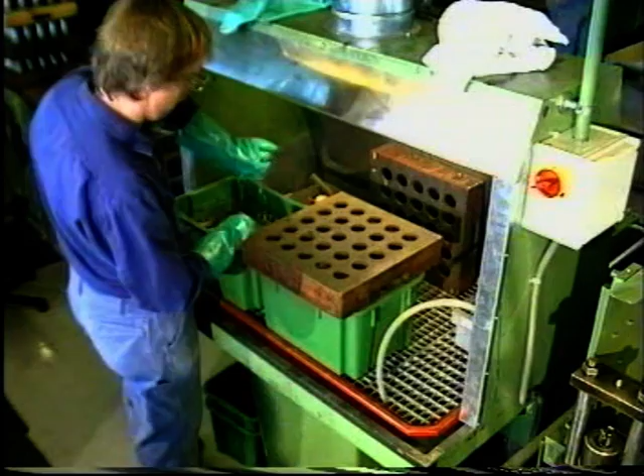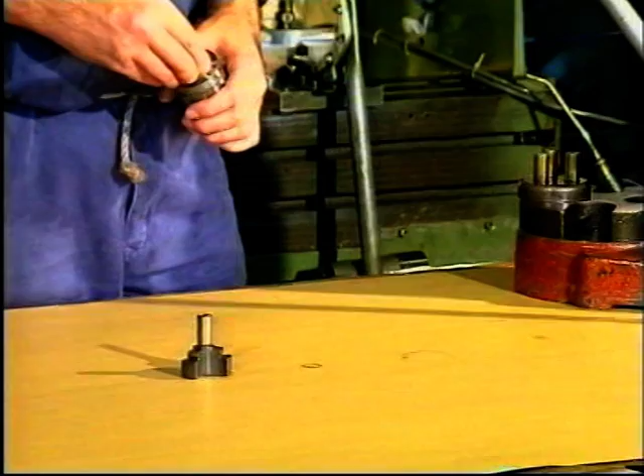All spindle guides are function tested before they are delivered.

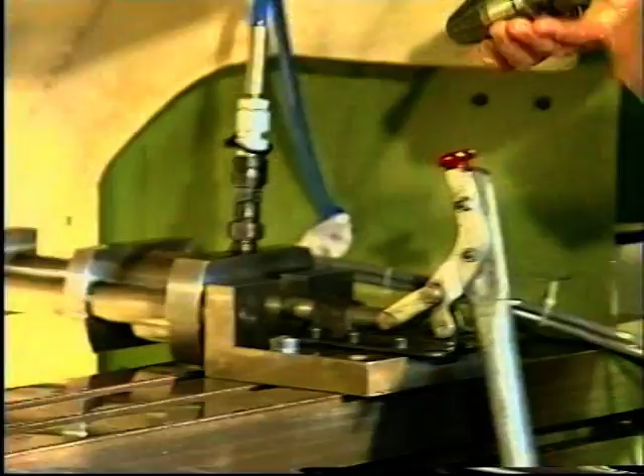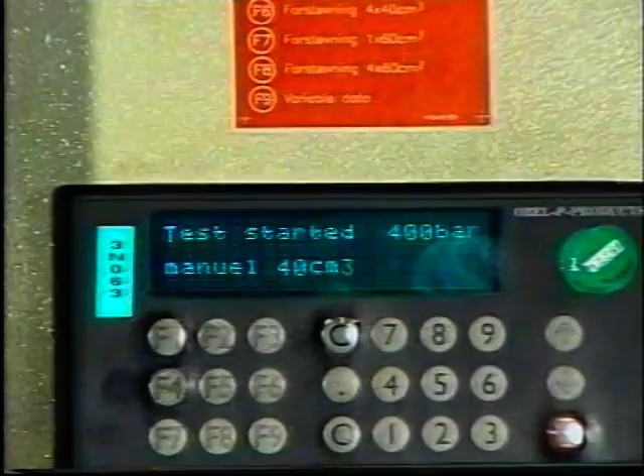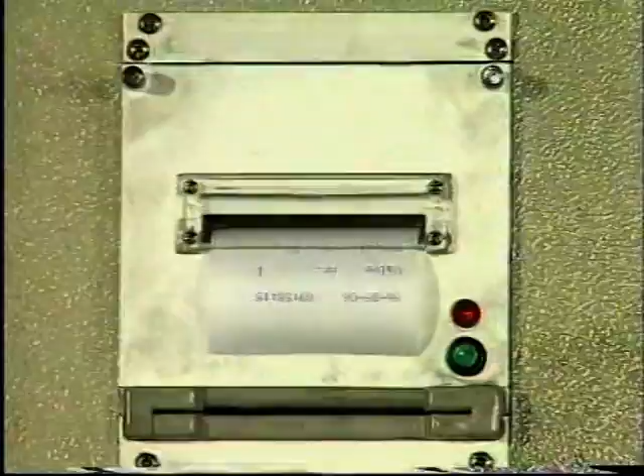All fuel valves are assembled and function tested before leaving the workshop. Overhauled fuel valves or fuel valves taken from stock must be function tested before they are mounted in the cylinder cover. The pressure testing pump is equipped with pressure gauges for displaying opening pressure, working pressure, venting function and air inlet pressure.

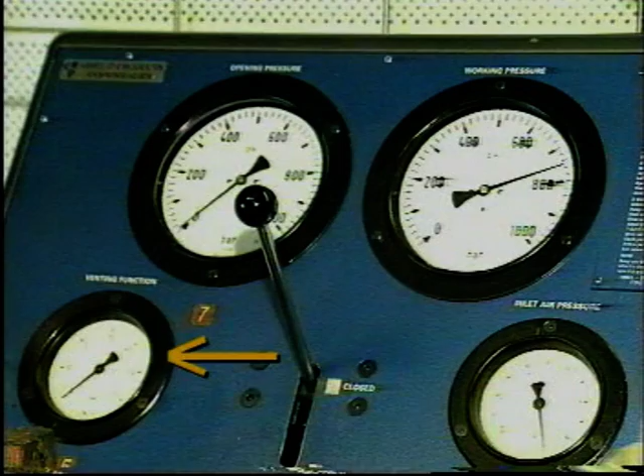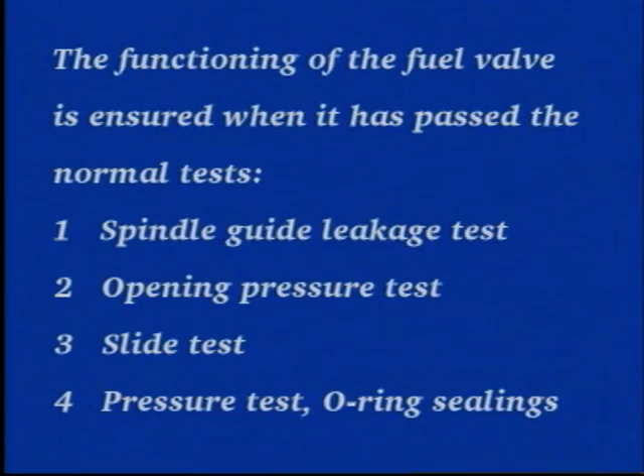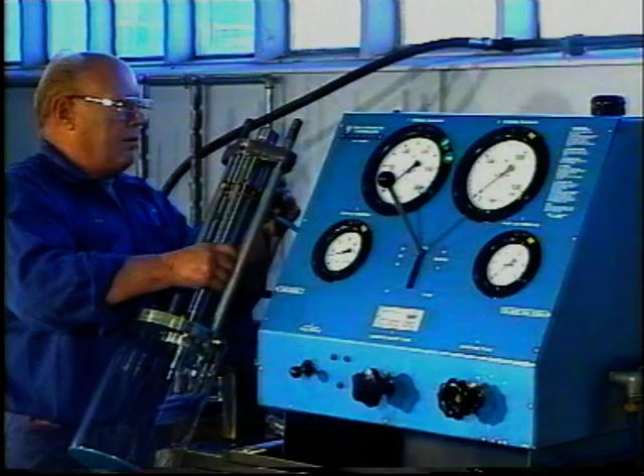Position the fuel valve in the test rig. For guidance on how to operate the pressure testing pump, refer to the supplier's special instructions.

To ensure that over-tightening has not taken place, check that the locking and indicating pins have not been bent or broken off. In the event of over-tightening, mount a new spring housing.

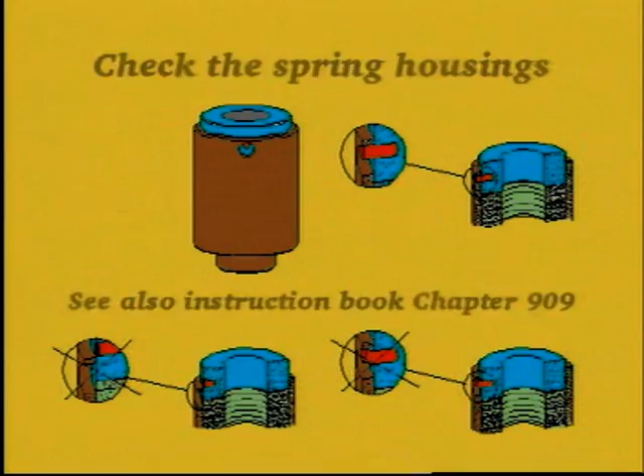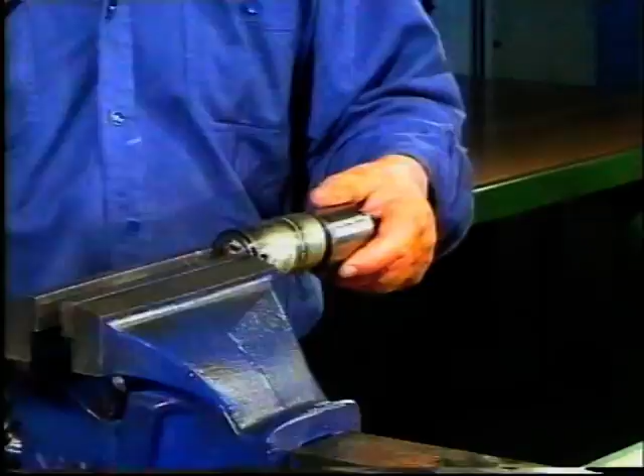A very important element in the correct functioning of the fuel valve, both during testing and in service, is ensuring that the spring housings apply the predetermined tightening force. To ensure that this force is present, a special tool has been designed to check the calibration of the spring housings. We recommend that the calibration of new and especially old spring housings be checked before they are mounted on the engine or on the fuel valve test rig.

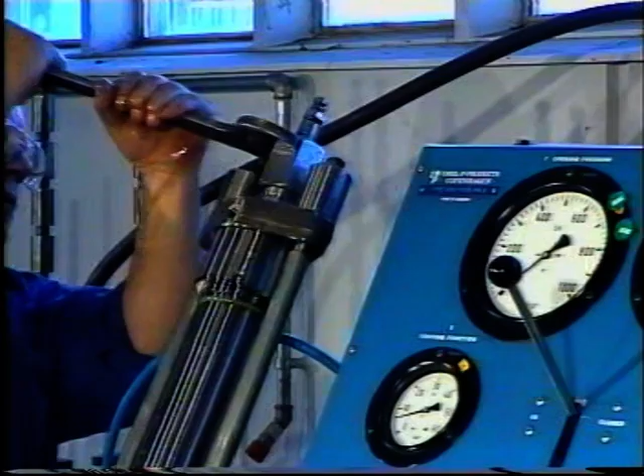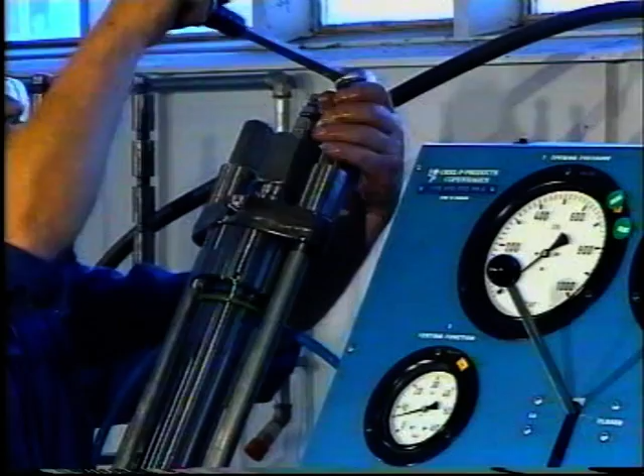Tighten the nuts until the top face of the pressure disc is flush with the top face of the spring housing.

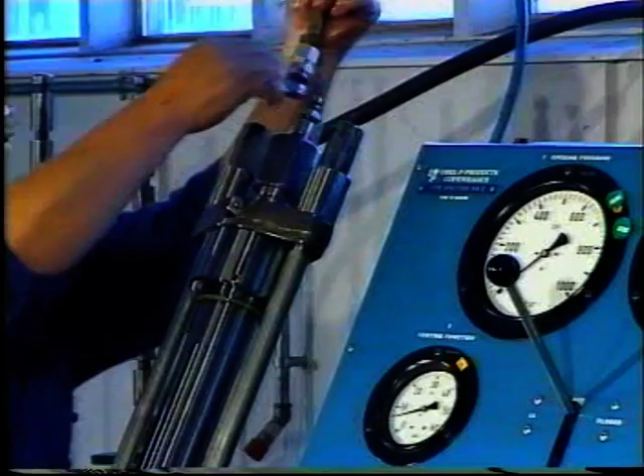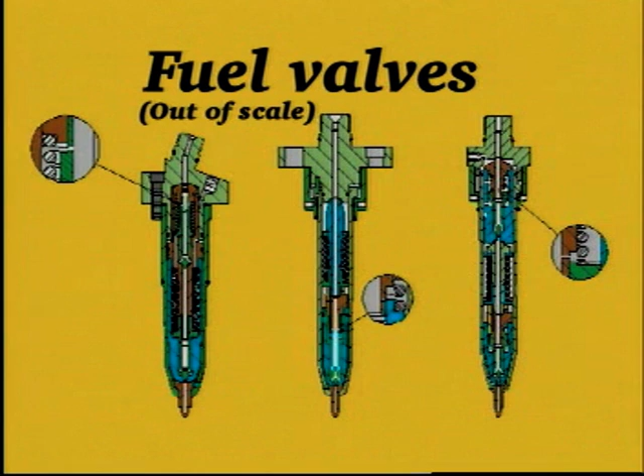Fuel valves are available in 3 different designs depending on engine size. Refer to your instruction book to see which valve is to be used on your engine. The pressure testing procedure is the same for all types of valve.

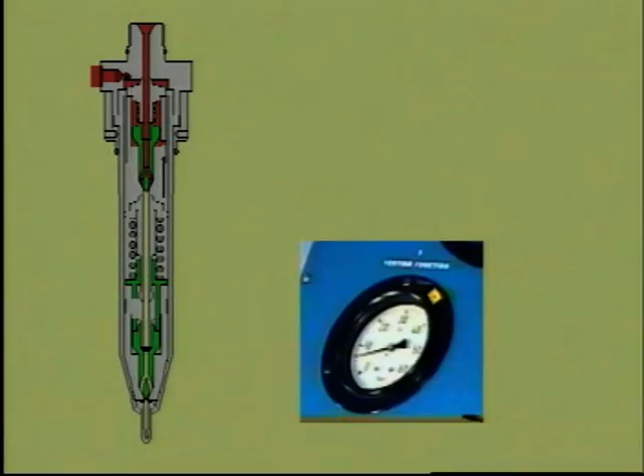Slowly fill the valve by pumping at low pressure until fuel oil, without air bubbles, flows from the fuel oil return pipe. Raise the pressure until it is above the opening pressure.

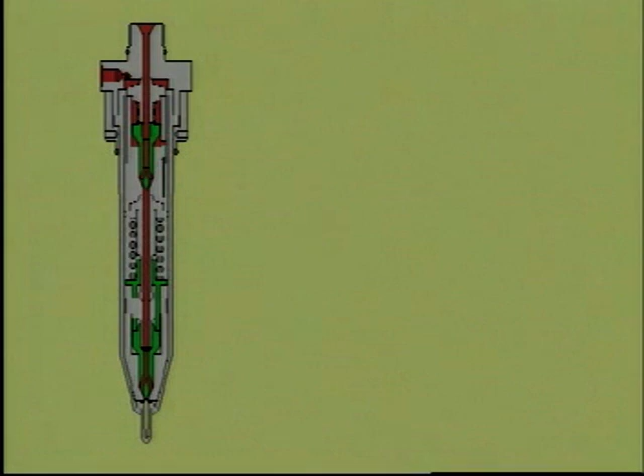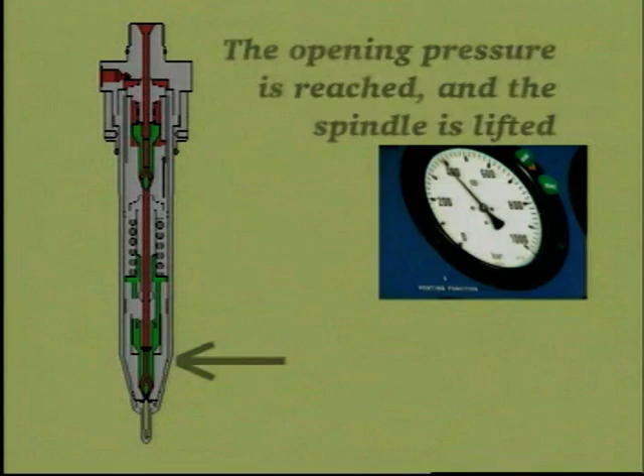Flush the valve for about 5 seconds.

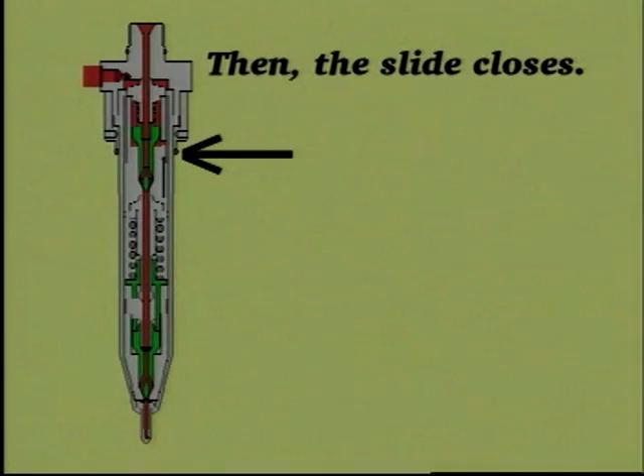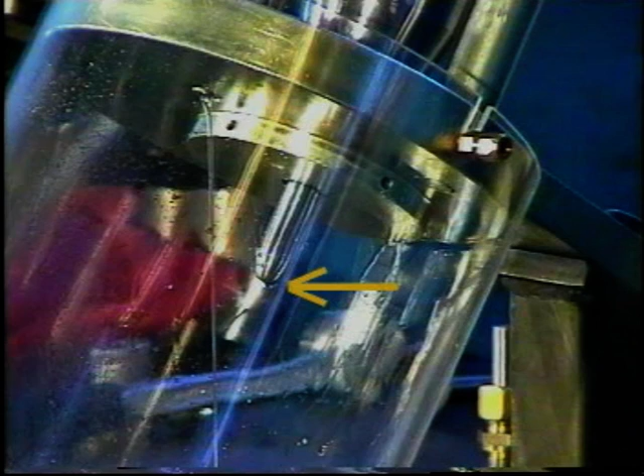There will always be a certain amount of fuel oil flowing from the fuel oil return pipe when the fuel valve is full of fuel oil and pressurized. Fuel oil must not seep from the fuel valve nozzle holes until reaching a pressure of 50 bar below the specified opening pressure. If the fuel oil does seep from the fuel valve nozzles, see Instruction Book, Volume 2, Chapter 909.

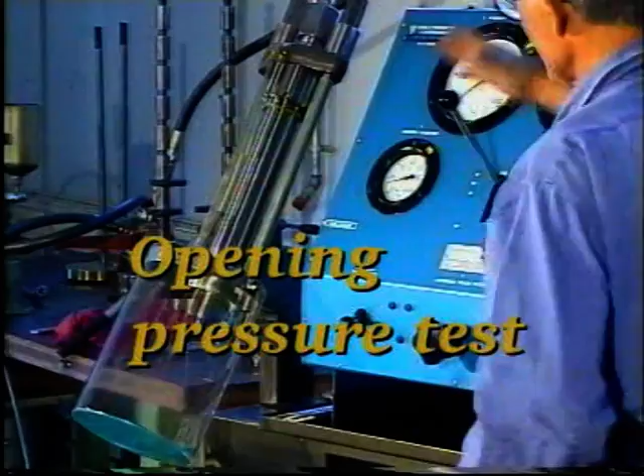Pump 5 to 10 strokes to fully open the valve and to blow out any dirt. Then relieve the pressure.

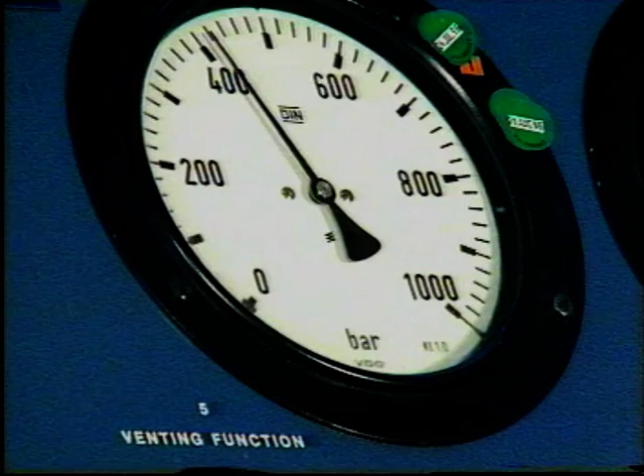Slowly increase the pressure until fuel oil is emitted from all the atomizer holes. Read the actual opening pressure on the pressure gauge marked opening pressure. Compare the actual opening pressure with the pressure specified in the Instruction Book, Volume 2, Chapter 909, and, if necessary, adjust the pressure by inserting or removing discs.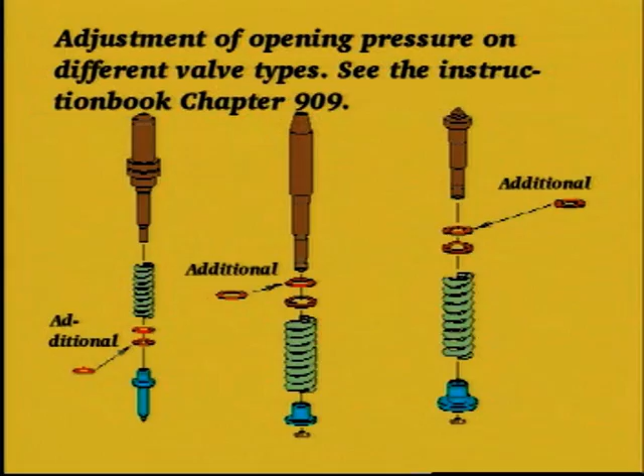Set up the thrust spindle in a bench vise with soft jaws. Compress the spring for the thrust spindle to remove the tension on the circlips, and then remove the circlips.

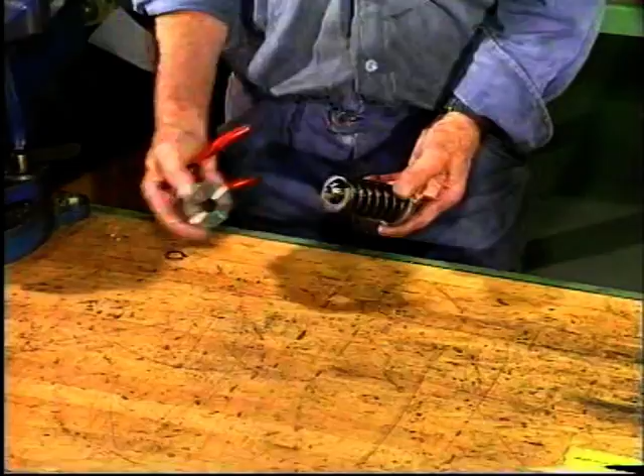Do not insert more than 5 extra discs when adjusting the pressure. The sum of the pressure markings on the extra discs must not exceed 150 bar. The fuel valve must be retested after any adjustment.

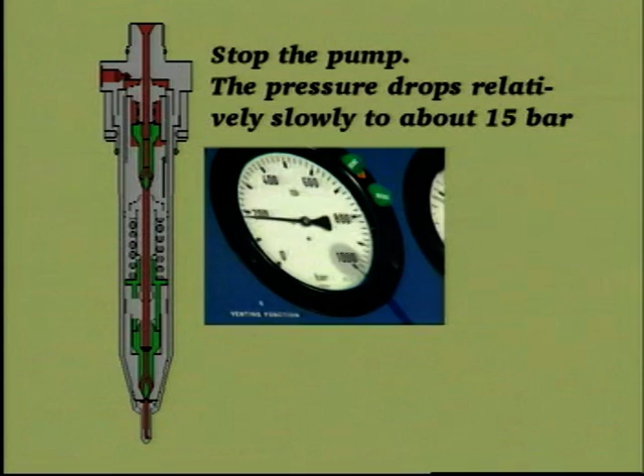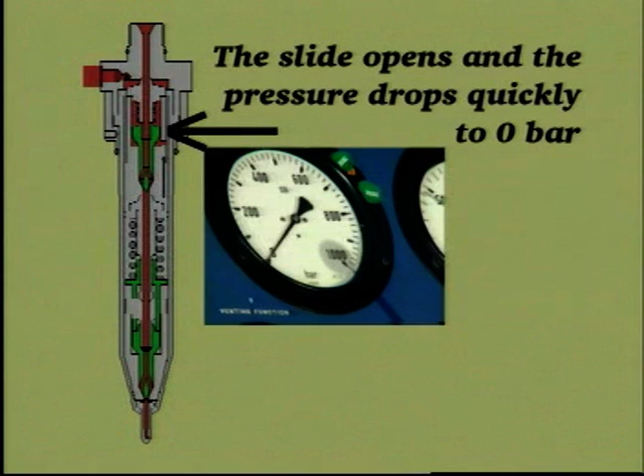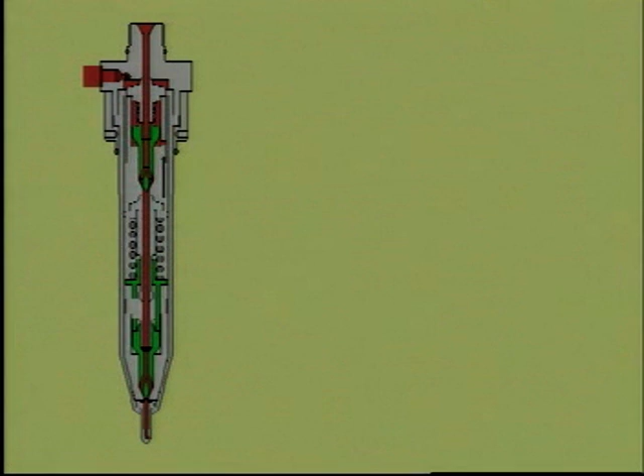If the quick pressure drop cannot be registered, the slide is sticking, or the hole is blocked. Disassemble and examine the parts, replace if necessary.

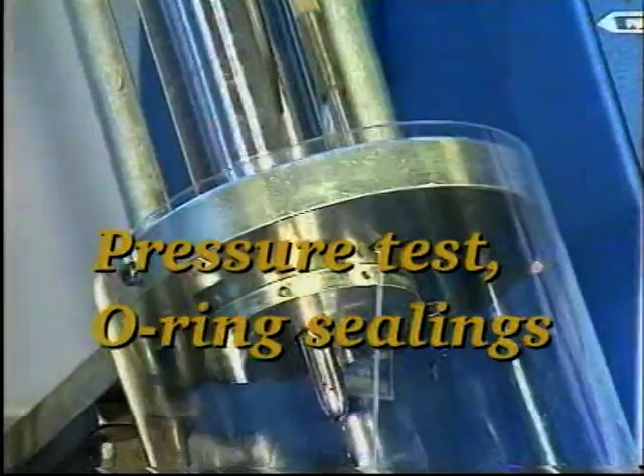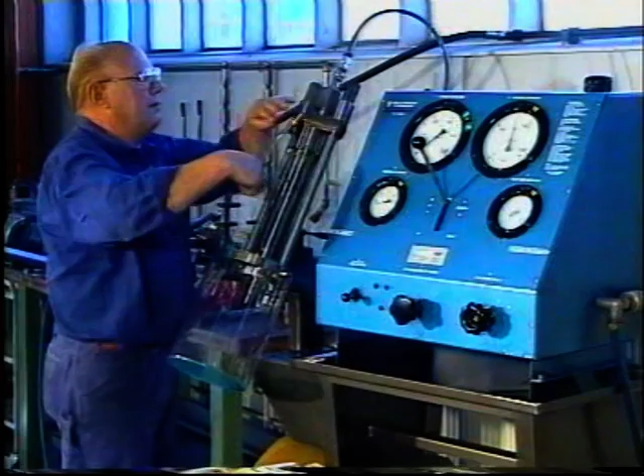Slowly fill the valve by pumping at low pressure until fuel oil, without air bubbles, flows from the fuel oil return pipe. Remove the fuel oil return pipe and block the outlet hole with a gasket and a plug screw.

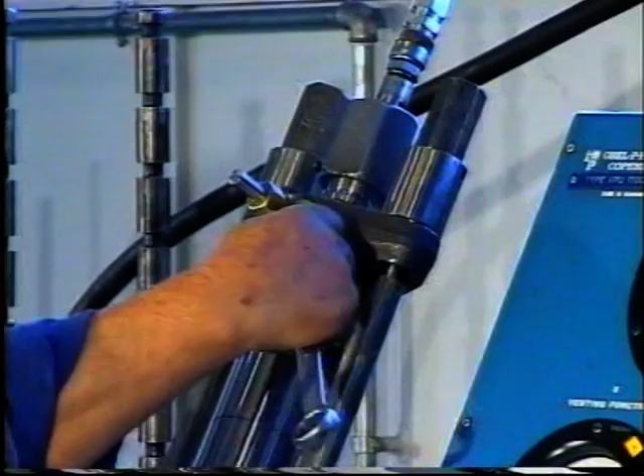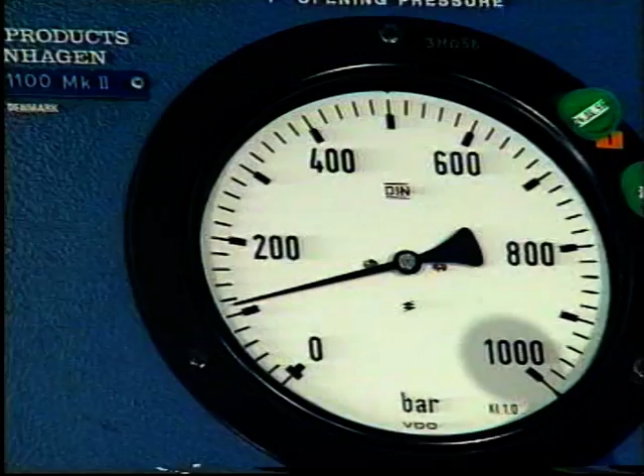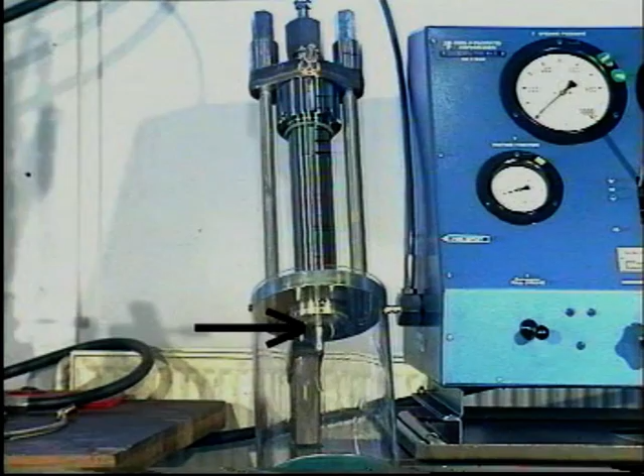Increase the pressure to about 100 bar and move the control handle to the closed position. The pressure should now remain at 100 bar. If oil leaks at the union nut, replace the O-ring seal of the valve head. If oil leaks at the lower end of the valve, replace the O-ring seal on the spindle guide.

After the fuel valve has passed all the tests, it can be mounted in the cylinder cover.

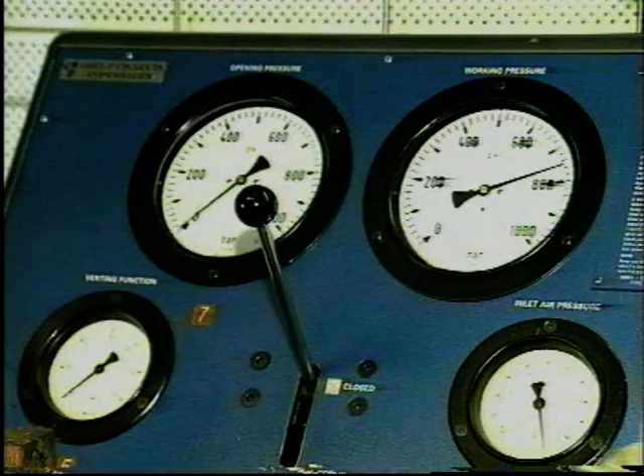The main objective of the normal tests shown in Part 3 of this film is to ensure that the valves function at the correct opening pressures and that they seal tightly. As the injection capacity of the engine fuel pump is much greater than that of the pressure testing pump, atomization will be ensured during service, provided that the fuel valve passes the normal tests.

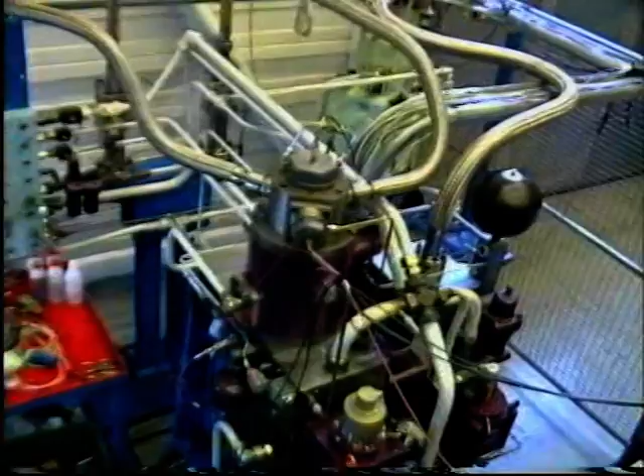The computer-controlled injection system, which is able to simulate the injection into a diesel engine, comprises a high-pressure booster pump, a servo fuel pump unit, and a computer control and monitoring system.

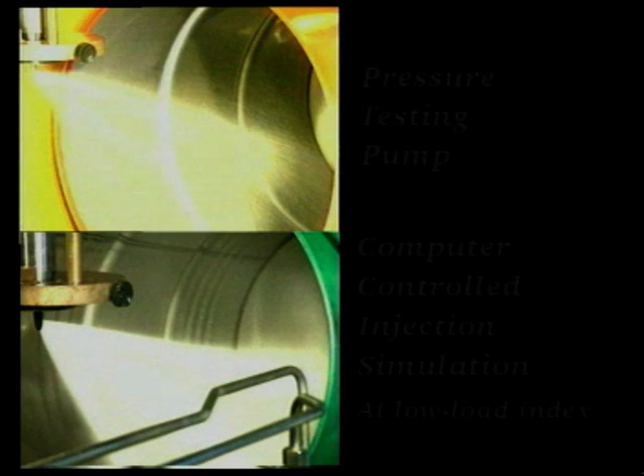Quality controlled spare parts from MAN B&W Copenhagen will ensure continuous and reliable operation.